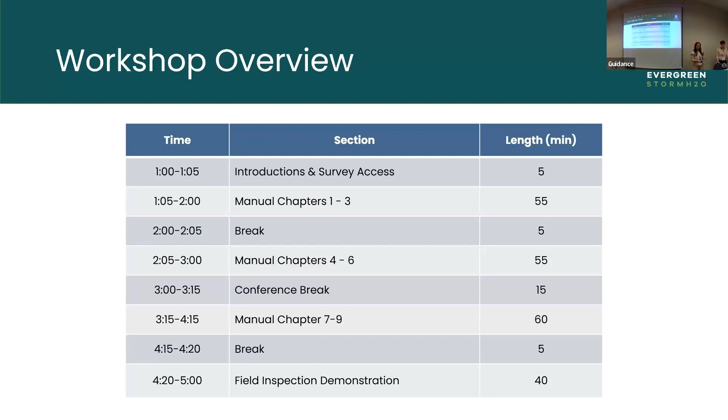We compiled all the information, talked to permittees, reviewed documents, but at the end of the day, those running these programs and inspecting BMPs already are, or are going to be, the experts on this. So we have pulled together some questions.

We're going to use Slido, and as we go through these strategies, we'll do a poll in the room to see what is actually popular among us. This is a great opportunity too—I know by looking at the attendee list, we have permittees from both Eastern Washington and Western Washington. So this afternoon is also an opportunity for you all to ask questions of each other, share lessons learned, things that work well, or challenges within your jurisdictions.

You can join Slido using the QR code. I apologize if it's too far away—come up here, it's not an app, it's all anonymous. Do you want to write down what the pin is? Yeah, so people can do that. If you can't use the QR code, it will re-pop up for every slide that has a question, so you'll be able to see it again. We can come back to it when we get to it. Is anybody able to use it right now? Yes.

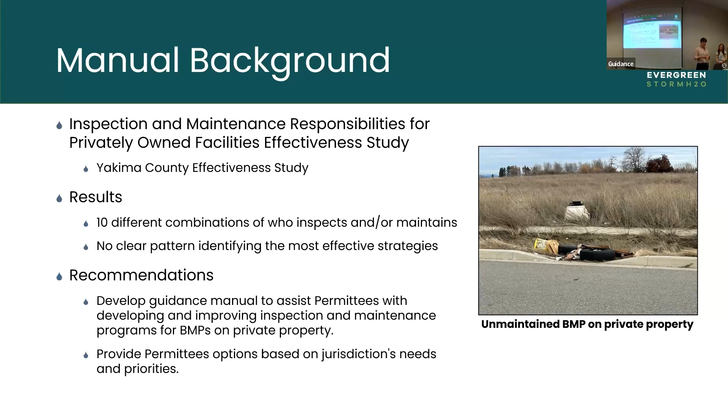Resources and access is related to having appropriate equipment available and access to BMPs. For O&M protocol, training and E&O, funding is also important, along with staff training and having E&O training materials developed. O&M protocol being provided to BMP owners is another important part of that.

When it came to documentation and record keeping, successful programs had current and complete documentation. Their process was easy to use. They communicated BMP responsibilities to owners, and owners were able to easily demonstrate compliance.

And then when it came to incentives and enforcement, some successful programs provided incentives, and jurisdictions had mechanisms in place to enforce those requirements.

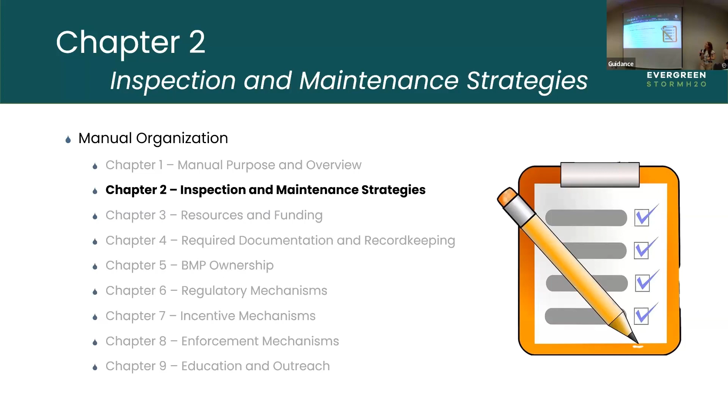Okay, chapter 2, the first one we're actually going to start on. This is the inspection and maintenance strategies. This chapter describes the importance of BMP maintenance and inspections, and also provides the different strategies for BMPs on private property.

So why are BMP inspections important? In the state of Washington, if you are developing and disturbing over a certain amount of area or have over the threshold of hard surface, you're installing structural BMPs on this site. We all know the first step is installing structural BMPs, but what's really important in order for our receiving waters to continue receiving that benefit is that they need to be maintained.

Inspections allow the permittee to go out and ensure that this maintenance is actually occurring, to work with property owners if it's not occurring, and also gives this opportunity to build relationships with these property owners and continue to educate them on the importance of stormwater and these BMPs.

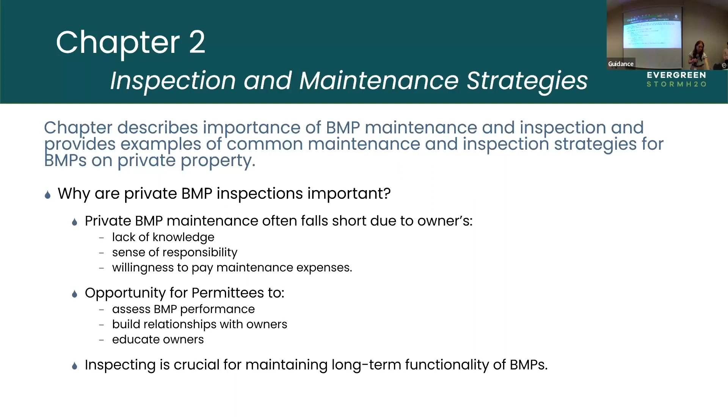In both permits, we have different types of inspections: construction phase inspections and post-construction. This manual just focuses on post-construction inspections and maintenance. We've divided these strategies into 3 categories that focus on who is doing the inspecting: the permittee, the property owner, or a qualified third party. It's important to note that some jurisdictions use a combination of these strategies.

In the Eastern Washington permit, you are required to inspect these BMPs after construction once every 5 years. In Western Washington, you're required to inspect these BMPs on an annual basis unless you have an approved alternative schedule.

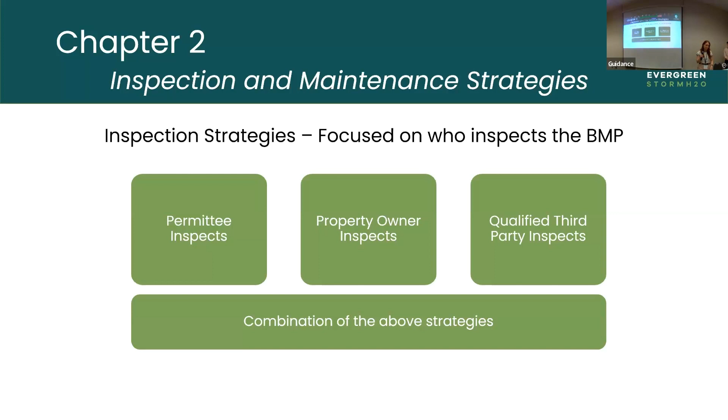Okay, just taking a poll again: what strategy or strategies does your jurisdiction use for inspecting BMPs on private property?

Awesome, so some more answers might trickle in, but this actually supports what we found. The first strategy we'll go into is the permittee inspects. This is when the permittee conducts a site visit on private property and assesses the BMP to ensure it's functioning as designed. In the Yakima County effectiveness study, as well as other studies we looked at, this was the most popular strategy among permittees.

So we're just going to highlight a couple of program elements and the things to consider when possibly developing these programs.

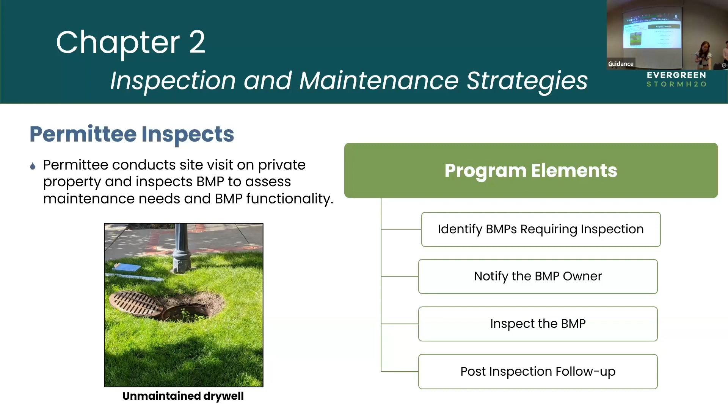The first one we'll dive into is identifying the BMPs requiring inspection. Obviously, before you can even begin inspecting, you need to be able to locate, identify, and map all of these private BMPs. Both in the Eastern Washington permit and Western Washington permit, mapping all of these connections to the MS4 is required by August of this year.

There are a couple of acceptable formats that ecology is accepting: CAD, GIS, or another software that can map points, lines, polygons, and has associated attributes.

Once you have that all pulled together, something you also may want to consider is reviewing previous inspection reports. This gives you an idea if you have specific BMPs or property owners that you might have some challenges with, and can give you an idea of how much effort is going to go into inspecting each of these BMPs.

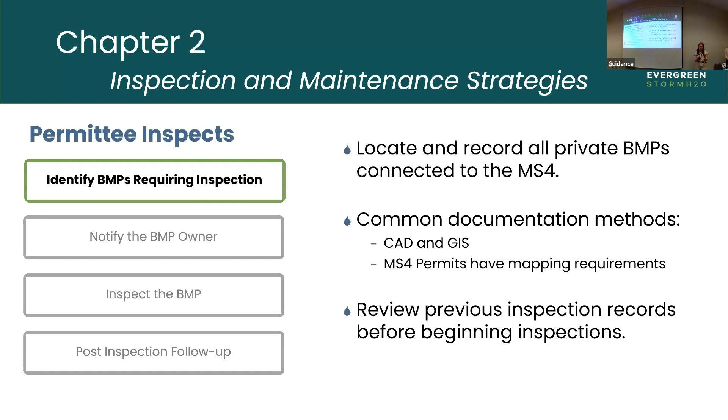Another component to this strategy is communicating with the BMP owner. Prior to the BMP inspection, you are going to need to communicate with the property owner, and the most common methods are either sending a letter in the mail or email.

Some permittees can have the property owner attend voluntarily, and we've actually talked to some permittees who have been requiring the property owner to attend the inspection. If the property owner is not attending the inspection, it's really important that you communicate with them prior.

You want to make sure that this BMP is accessible and that you can actually get to it. Some people don't even realize they have a BMP on their property, so communicating where it is, that they understand this, the importance of why we're out here maintaining and inspecting. Lastly, this gives an opportunity to ask if there have been any challenges or issues that this property owner has been experiencing with their BMP.

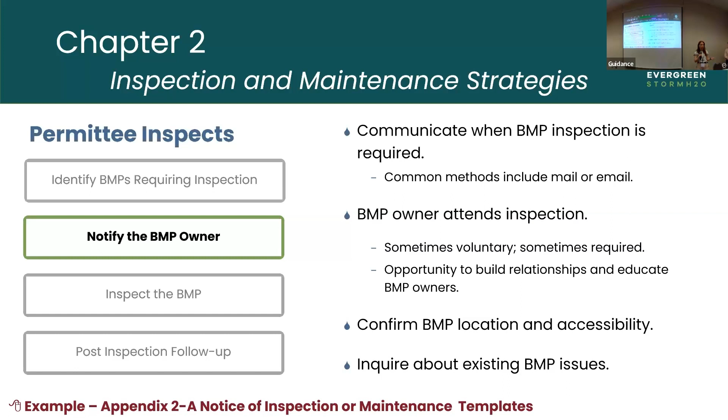I want to highlight that as part of this manual, we have provided a lot of examples and templates in hopes that if you are starting to develop this program, you don't have to start from square one. In Appendix 2A, we have collected some examples of templates for notifying property owners for both inspection and maintenance.

Then obviously the elements of inspecting the BMP. BMP should only be inspected by trained staff. Often when you are out, you are using something that is guiding that BMP inspection, whether that's an O&M manual—sometimes those O&M manuals are used to build a checklist. This can be either in paper copy form, or the pattern we're seeing is transitioning to using some type of software on a tablet in the field. Make sure you are documenting all of your observations and non-compliances.

One thing to highlight is a situation where an owner may refuse property access. Speaking to permittees in both Eastern and Western Washington, this has been very rare, but there are some instances where it has occurred. So when developing a program, think about building a policy and process for when this happens, making sure you're consulting your legal team throughout, and that all of your staff are trained to know how to handle that situation. It's also really important to document this. If you are attempting to inspect a BMP and cannot because of property owner issues, that's something ecology would like to know. So make sure you're documenting when this happens.

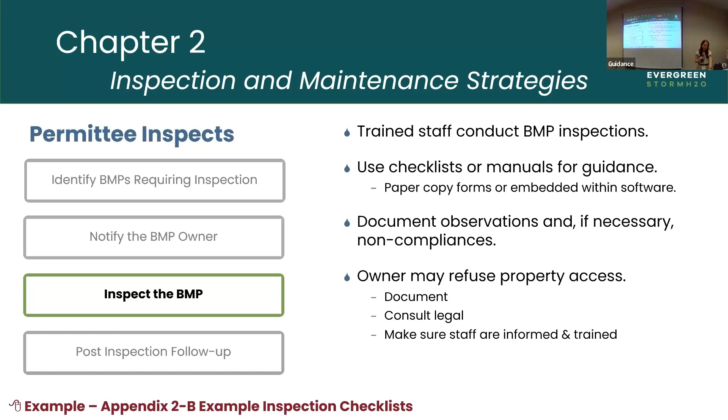Lastly, the element we describe in the manual is following up. This may be delivering all of these inspection results, developing that paper trail for yourself and for the property owner. If maintenance is required, you're outlining what that needs to be, when it needs to be done by, and you may also schedule a follow-up inspection—that would be the time during this correspondence to do that as well.

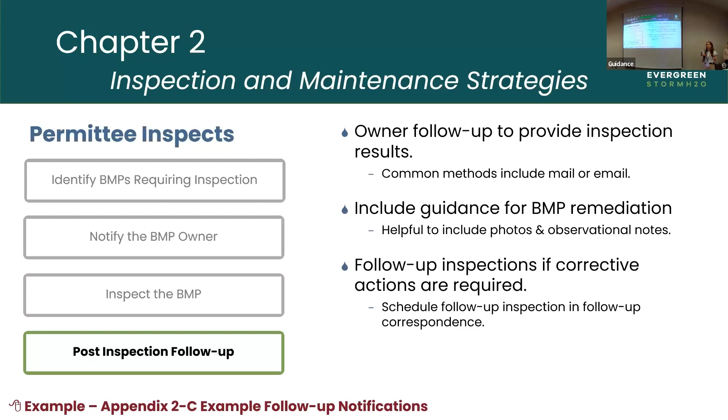In Appendix 2C of the manual, again, we have templates for emails or letters for follow-up inspections as well.

So the second strategy the manual briefly covers is property owner inspects. This is when homeowner associations, private business owners, or individual property owners inspect their own BMPs to assess if maintenance is needed. This was the second most common strategy in the Yakima County study, for people outside of Washington state.

In Washington, it is defined in both the Eastern Washington permit and Western Washington permit that BMPs must be inspected by qualified personnel. I have the definition here on the screen, which is the same in both permits. One thing I want to highlight is 'and/or volunteers.' This is not a situation where your neighbor down the street raises their hand and says, today I want to be a BMP inspector. This needs to be somebody with qualified experience, and in this situation should have approval from whoever you're working with at ecology.

So you think, why would we have this? In Washington state, the property owner should not be conducting their own BMP inspections. We include this in the manual and highlight it because if you're looking at other reference material, or if you happen to be a jurisdiction neighboring another state and you look at how things are done there, this comes up—we're highlighting it because it is done in other states around us, but it should not be done in Washington state.

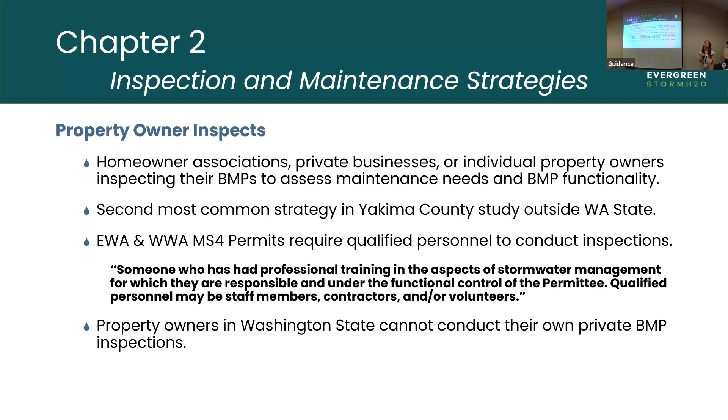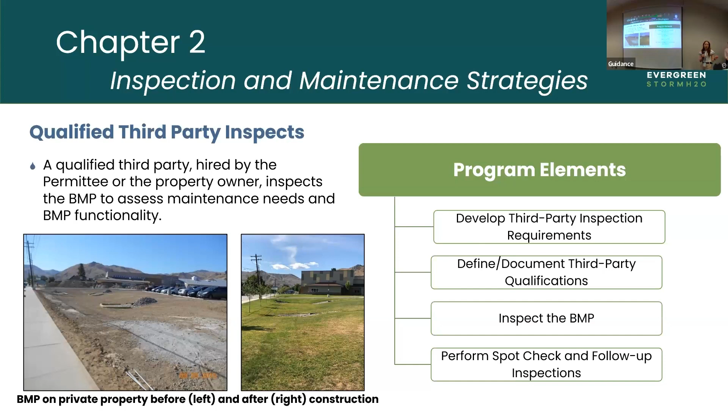So the third strategy we highlight is when a qualified third party inspects. Specifically in the Eastern Washington manual, in lieu of requiring continued property access, you can have a qualified third party inspect the BMP on an annual basis and submit a certification that maintenance is occurring and the BMP is functioning as designed. This is one that is often combined with other strategies, so we include it in this guidance manual. We'll go over some elements that are a little different than when the permittee is inspecting.

First is developing that third-party inspection requirement. You as the permittee may decide you want to allow this as an option or even a requirement. The other part to consider is who's going to be hiring the third party—is the permittee going to hire them, or are you going to leave that up to the property owner? Whichever path you choose, it's really important that this is documented. I have looked at several different codes with Eastern Washington permittees specifically, and a lot of these types of requirements are documented in code—that is the best place to do that.

Something else to consider is that in the way you document this requirement, make sure the property owner is still liable for the functionality of the BMP. So regardless of who they hire to inspect—or we talk about this also with maintaining—specify that regardless of who that is, the property owner is still liable for the functionality. Hopefully this helps, if there are any disputes, to minimize the finger-pointing in those situations.

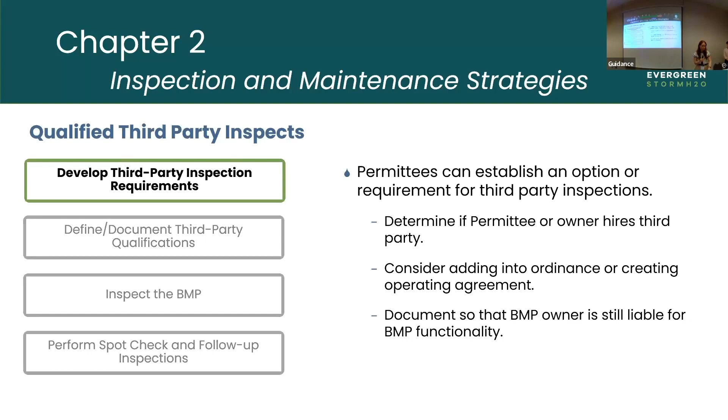Next would be defining or documenting the third-party qualifications. So you as the permittee can specify the qualifications for these inspectors or also for maintaining.

Speaking to different permittees, there were a couple of different strategies used, so three that I'll highlight. One is just defining the minimum knowledge for the O&M standards. That also might be specific to BMPs in your jurisdiction, making sure they know the design standards and the operation and maintenance standards for these BMPs.

A second option is requiring a third-party certification or training. For example, ASCE has an inspection and maintenance certification that you can get by taking their training.

And then the third option that I have seen both permittees from Eastern Washington and Western Washington use is actually developing a list of pre-selected vendors or contractors. You can go through and find people who provide these services in your area and put together a list of these different services.

I will repeat again, for all of these lists I have seen in both Eastern Washington and Western Washington, there is always a disclaimer that says you, as a property owner, are still liable for the functionality of the BMP.

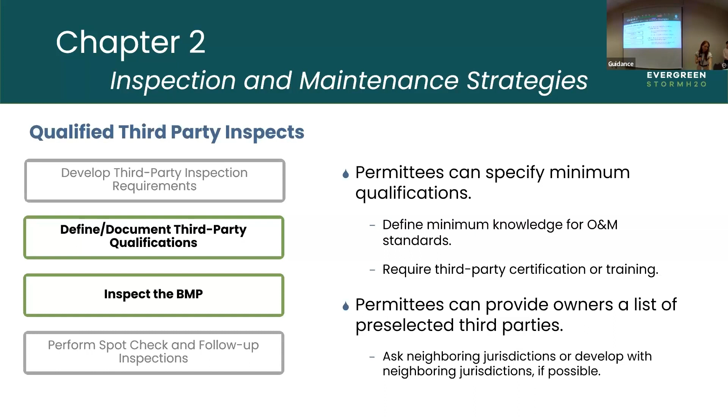And then lastly, another program element you may want to consider implementing would be spot checks or follow-up inspections. The two common reasons we have found that permittees have done this are: A, you're just getting some funky inspection reports back and you may want to go out and verify that maintenance is actually happening; and B, if there is a physical complaint about a BMP.

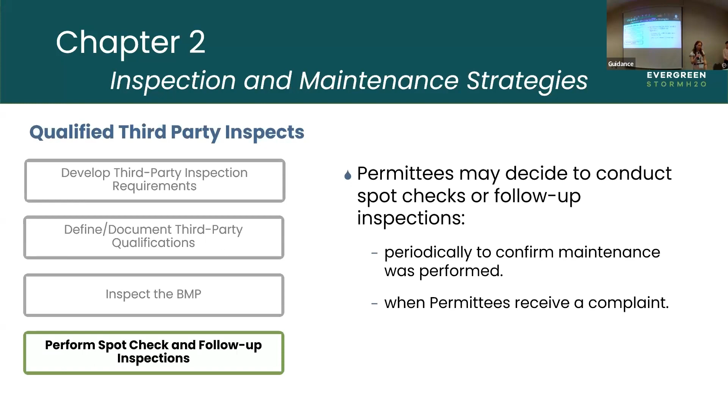All right, so we'll switch to maintenance strategies now. Over the past decades, current design standards have focused on on-site stormwater management. More BMPs have been installed on private properties, especially commercial, multifamily, and subdivisions. Previously, these BMPs did not require inspections, and permittees weren't necessarily able to confirm that they were being properly maintained.

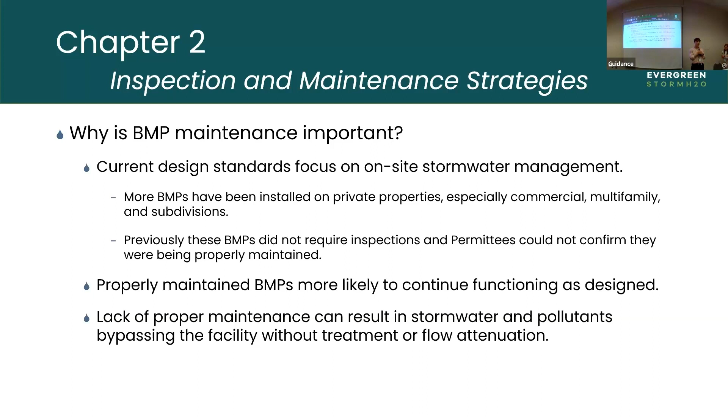Properly maintained BMPs are more likely to continue functioning as designed. That lack of proper maintenance can result in stormwater pollutants bypassing the facility and going down to your receiving waters without treatment. So this is why BMP maintenance is important.

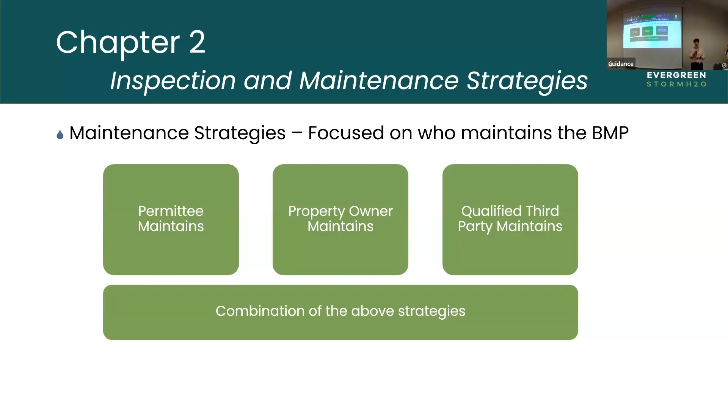So to start off, the three maintenance strategies that we identified during the study, as well as a combination, are up on the slide. We have the permittee maintaining the BMP, they're the one performing the maintenance. We have property owner maintaining the BMP, and a qualified third party maintaining the BMP. What was fairly common as well was a combination of these strategies reported during the study, so I'll try to note when we especially saw that as I page through the next couple of slides.

We'll start off with talking about when the permittee maintains. This would be when the property owner provides the permittee access to the BMP, and that permittee performs maintenance, including providing the necessary equipment and labor.

Some of the program elements include developing prioritized categories, developing maintenance agreements or other contracts, identifying BMPs requiring maintenance, notifying the property owner that maintenance is going to be occurring, and then actually performing the maintenance. So I'll step through those in the next couple of slides.

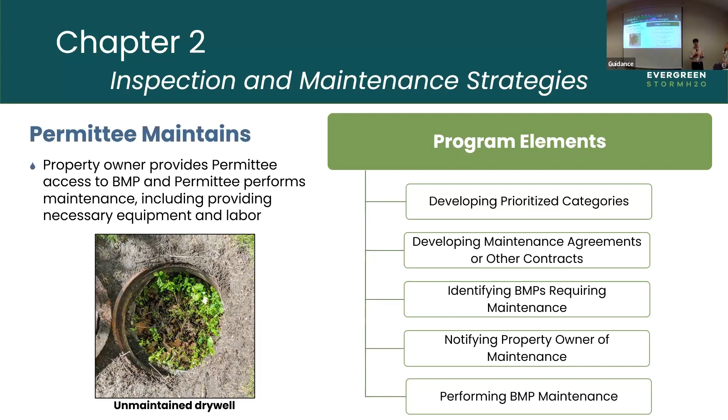So first we have developing prioritized categories. The reason we start with this is this was the least common strategy reported in the effectiveness study, and every time it was reported, it was used in combination with another strategy.

What tended to happen was permittees would elect to provide maintenance just for high priority BMPs. Those could be BMPs located upstream of a 303D, a TMDL, or other sensitive water body. It could also be where there was a proprietary treatment technology requiring specialized treatment, specialized training, or equipment, or where a BMP design or maintenance was a little bit outside of the norm. Then lower priority BMPs would be maintained by the BMP owner or by a third party.

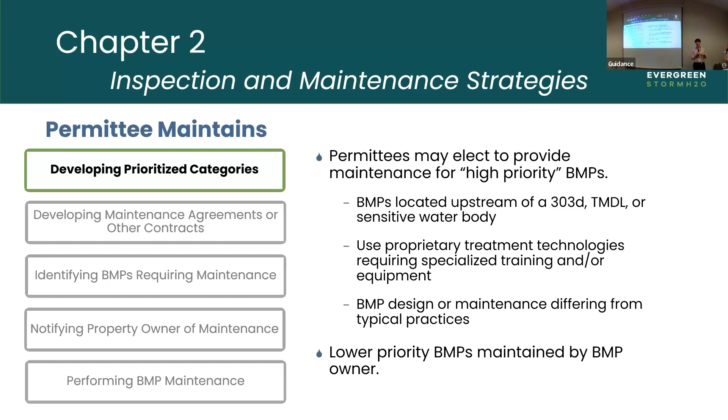The next element is developing maintenance agreements or other contracts. This would be where the permittee would use these to provide maintenance for facilities. They would define who maintains, what the required maintenance is, and the maintenance frequency. The permittee may also choose to cover the costs or collect costs from the BMP owner, which would be specified in the agreement.

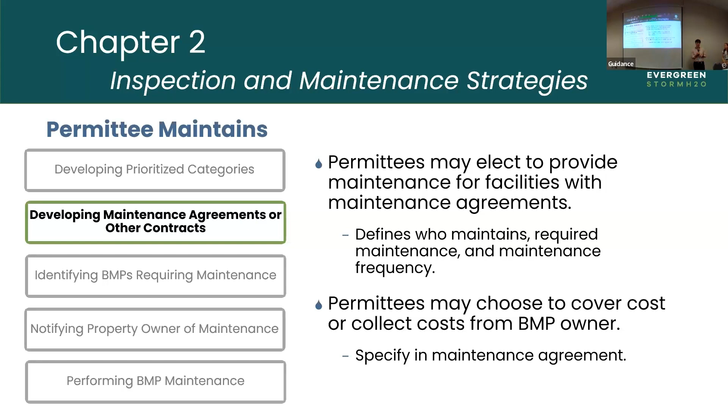Then we have identifying the BMPs that require maintenance. These would be identified through issues identified during inspections, or according to some sort of seasonal or other frequency. Permittees can create a maintenance action list using items from that inspection list, and they can also take from documentation where a BMP may have been non-compliant. Some permittees choose to perform maintenance just generally on a specified frequency, regardless of those inspections.

Next element is notifying property owner of maintenance. I'm not going to speak too much about this since we've covered it for the inspections, it's very similar. When the property owner is notified of maintenance, an inspection report might be referenced or some other documentation.

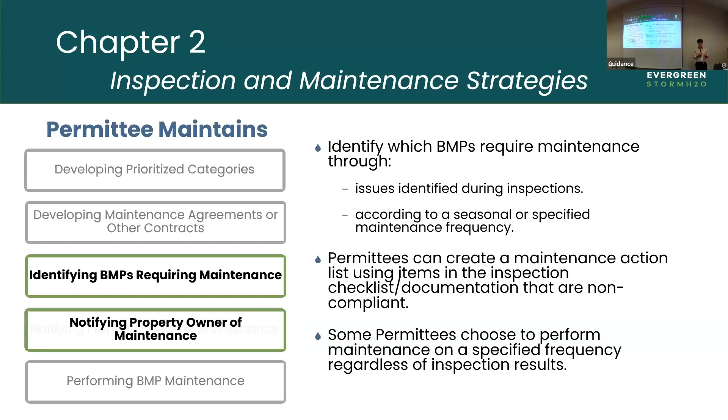And then the last item is performing the BMP maintenance. This is where trained staff should be performing that. Common materials that might be used for outlining what maintenance is required include permittee developed checklists, BMP specific O&M manuals, and the maintenance sections of the Eastern Washington and Western Washington manuals. Maintenance should conform to the standards in those manuals, or according to the manufacturer's specifications for proprietary devices.

Before I move on to the next strategy, some of the advantages of the permittee maintaining include: the permittee has control over the BMP that might be closest to a sensitive water body, so they can protect against a greater threat to that water body. They're more likely to ensure that proper maintenance is conducted for that BMP, and they're also more likely to have access to specialized equipment if needed.

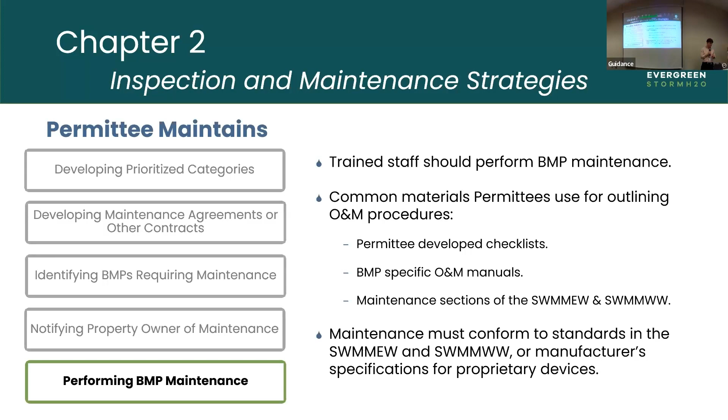One of the drawbacks of this strategy is that it is very costly in terms of staff time and resources. It may also require additional training for existing staff.

So the next strategy I'll cover is when the property owner maintains. This is when homeowners associations, businesses, or individual private property owners perform maintenance for their BMPs on their property. The elements of this strategy include notifying the property owner that maintenance is required, conducting education and outreach, and requesting records of BMP maintenance.

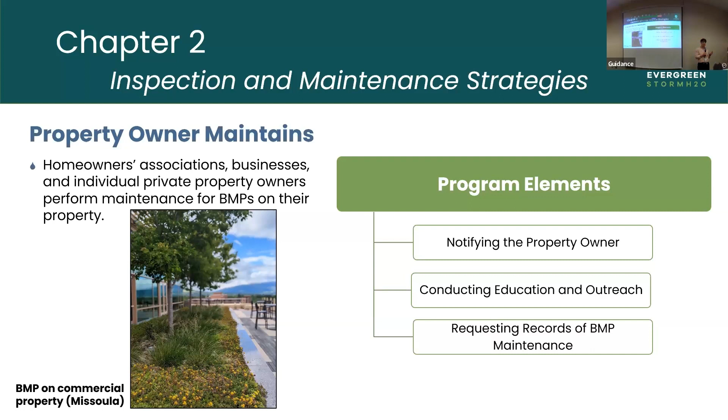So I'm going to skip over notifying the property owner, that's similar to what we covered on the previous maintenance strategy as well as the inspection strategy, where the property owner might receive a notice via mail or email, and it might reference a recent inspection report.

The next element is conducting education and outreach. The permittee might elect to conduct efforts with these BMP owners before they maintain the BMP. Ways that they might send out the information include one-on-one training in person, workshops, social media or some other form of media, and it may also be provided in terms of a manual that the city or jurisdiction develops. Operation and education and outreach is described more in Chapter 9, so we'll get to that later this afternoon.

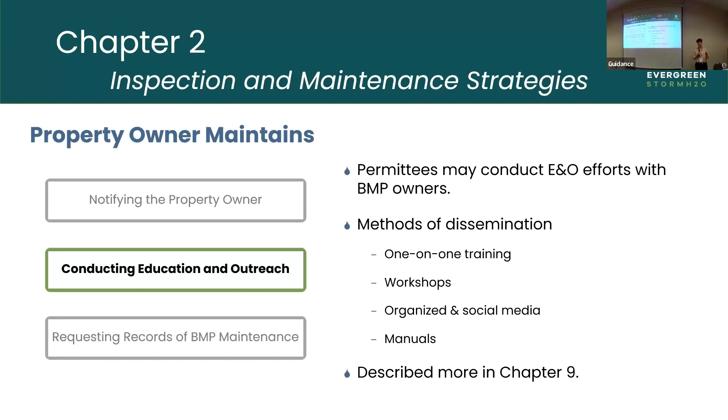The last element is requesting records of BMP maintenance. Some permittees require BMP owners to submit records proving maintenance. These records might include an inspection checklist, a list of which maintenance actions have been performed, or photos. It's important to develop a system to track and maintain those records, depending on what they come in as, and it's also important to note that that documentation proves that maintenance happens, and that's important.